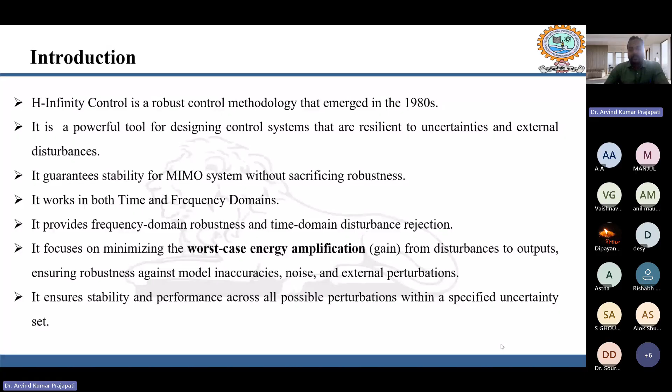It ensures stability and performance across all possible perturbations within a specified uncertainty set. So these are some advantages of H infinity control which we have seen.

So now how did H infinity control come about? In the early 20th century, classical control was proposed, based on trial and error methods like Nyquist plots, Bode plots, and time domain analysis, in which we use PID controllers. These controllers can work in real systems, but they are complex or difficult to use to handle uncertainties or non-linearities, etc.

So to avoid these limitations, modern control theory came into the control system, which is focused on state space representation and optimal control techniques. State space representation means we can represent plants in a state space model, and then control the plant using digital systems. If it is in transfer function form, it is difficult to handle by a digital system. But if you convert your system into state space models, we can easily handle it using digital systems. Then another topic in modern control is optimal control.

In optimal control, the most used techniques are LQR and Kalman filters. The main aim of these controller techniques is to design controllers so that we get optimum performance from the system. However, these methods are also unable to handle the uncertainties or disturbances coming into the system. So in the 1970s, researchers became familiar with these limitations, and they started working on how to design a controller that could also handle uncertainties and external disturbances.

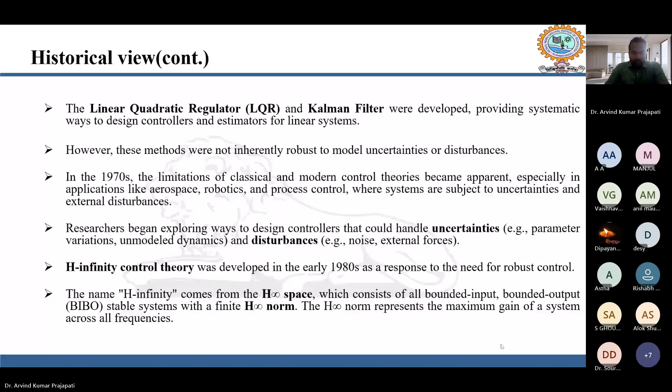So here we are going to learn how H infinity control came into the control system. In 1981, George Zames first introduced the concept of H infinity in terms of sensitivity minimization, meaning he proposed techniques to minimize sensitivity. Sensitivity means our system becomes less sensitive with respect to noise, disturbance, uncertainties, etc. This concept is similar to H infinity control.

Then in 1984, Doyle and Vinnicombe proposed the formal H infinity control problem, which can be solved using algebra, using a transfer function approach to achieve robustness, performance, and robust stability. H infinity control was developed by K. Glover and John Doyle, which can be solved using Riccati equations.

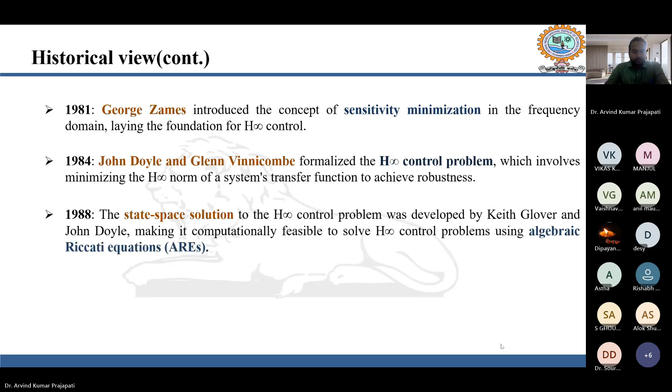So now we can see what is the meaning of H infinity. H infinity is made of two letters, H and infinity. What is the meaning of H? H means Hardy space, which is used to describe the spaces of stable systems in control theory. And infinity emphasizes the H infinity norm, which represents the worst case scenario across all frequencies, meaning it is the gain obtained by the worst disturbance implemented in the system.

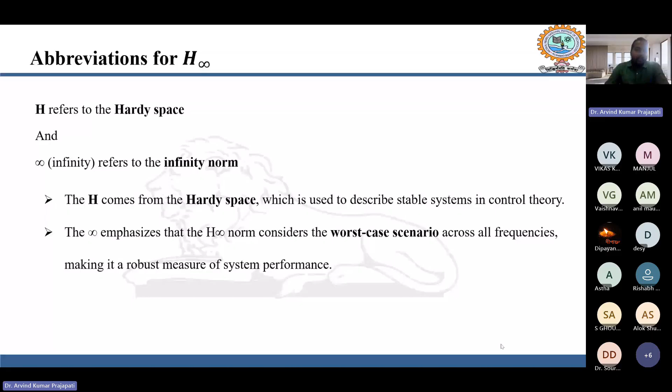So now, what is Hardy space? Hardy space is the space of complex valued functions which are analytic in the right half of the complex S plane. It means the spaces lying in the right half of the S plane, where the real part is definitely greater than 0.

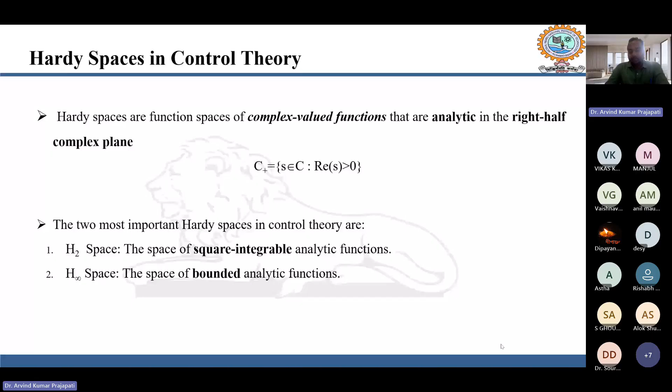In Hardy space, there are two control theory spaces: H2 space, the space of square integrable and analytic functions, and H infinity space, for bounded analytic functions. Now we will see what is H2 space and what is H infinity space.

H2 space consists of all functions of a complex function F(s), which are analytic in the Hardy space, and must satisfy the condition that the H2 norm of the complex function is less than infinity, as given in equation 1. For stable systems, we can calculate the H2 norm using equation 2, defined using the frequency response.

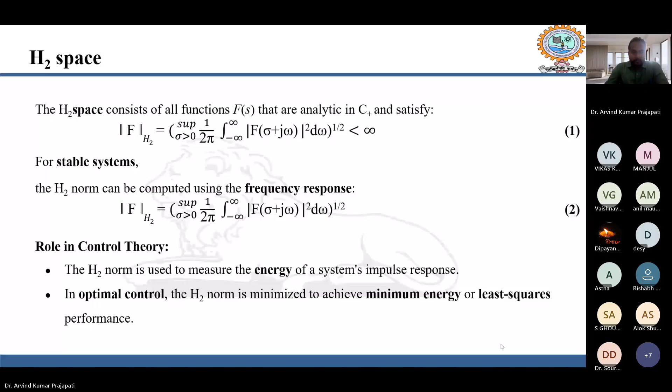So what is the role of H2 in control theory? H2 mainly measures the energy of the impulse response, and in optimal control, the H2 norm is used to minimize the minimum energy or least square performance. Now we can see what is the H infinity space.

So again, H infinity space we can define as all the functions that are analytic in the Hardy space C plus and which satisfy equation 3, meaning the H infinity norm of the complex function F should be less than infinity. For stable systems, H infinity is nothing but the supremum of the complex function, supremum of the singular values of the complex function.

This measures the worst case gain of a system, which is critical for the robustness of the plant. In H infinity control, the goal is to design the controller that minimizes the H infinity norm of the closed loop transfer function, which ensures robustness against disturbance and uncertainty.

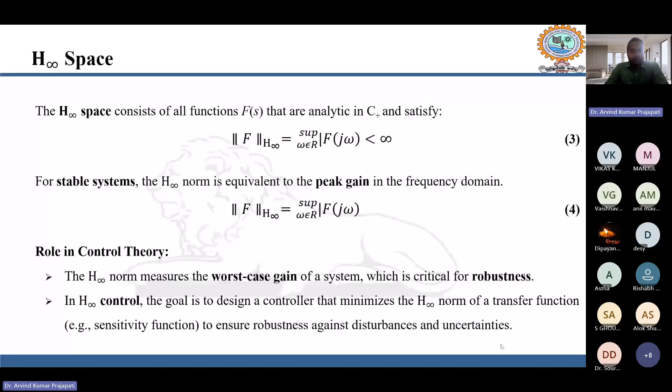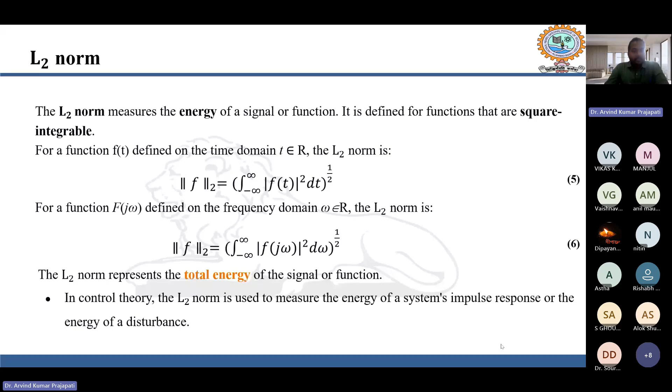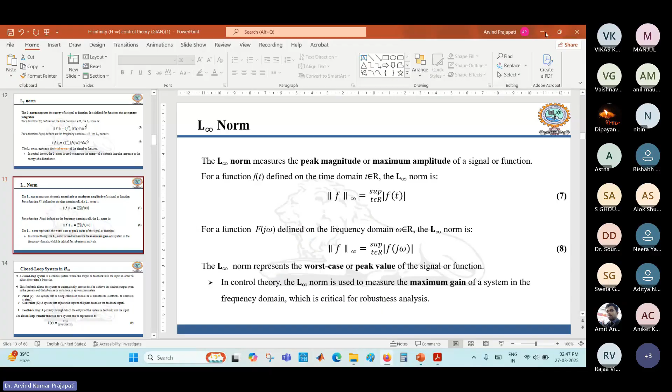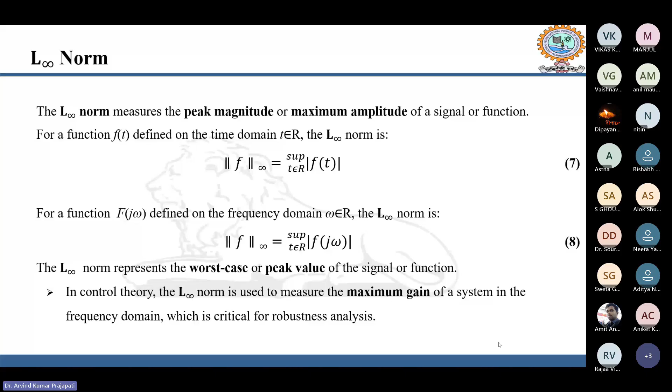So the L infinity norm in control theory is used to measure the maximum gain of the system in the frequency domain, which is critical for robustness analysis.

So the H infinity norm is used in the closed loop system. A closed loop system has a forward path and a closed feedback path. In the closed loop there are three blocks: the plant, which is what we will control; the controller, used to manipulate the control input; and the feedback, which is the path by which we feed the output back into the input side.

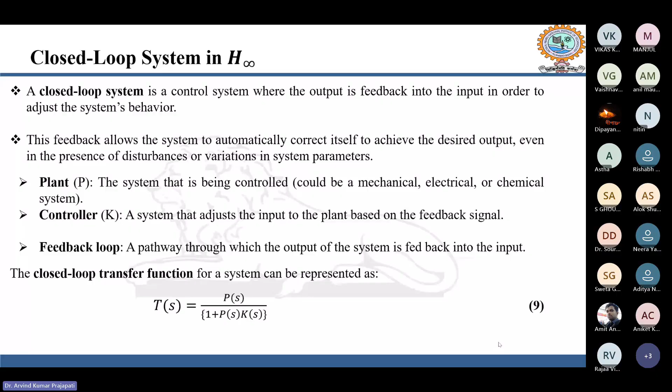So now we are going to define the problem statement of H infinity control. The main goal of H infinity control is to minimize the closed loop transfer function of the system. We have to design the controller so that we can minimize the closed loop transfer function T, and K can also stabilize the system internally. For a given plant, as in equations 11, 12, and 13, we are going to implement our H infinity control. As we have seen, there are two inputs and two outputs.

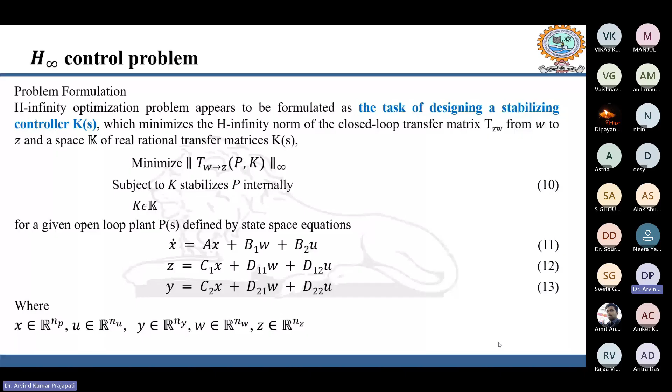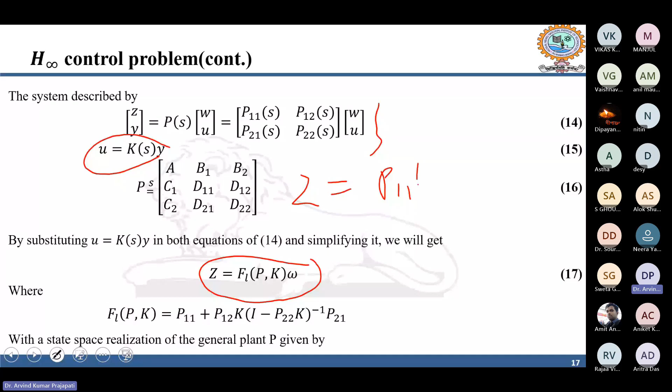So by putting U equal to Ky in these equations, we can convert this into the form: Z is equal to P11W plus P12U, and Y is equal to P21W plus P22U. Here, if we put U equal to Ky in this equation, then we get Y is equal to P21W plus P22K times Y.

So here Y and Y is there, so we can take common. We will get Y value, and here we have already put U equal to Ky, so that Y we will keep here. So we will get Z, which is nothing but P11, P12, and this times W. So what is the use of this?

So here we are going to correlate the output error with respect to disturbance input, reference input, or uncertainties. Here we can see the disturbance or reference input or uncertainties are directly related with the error Z.

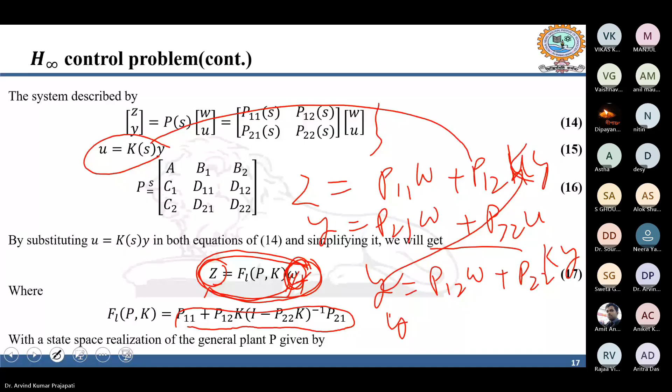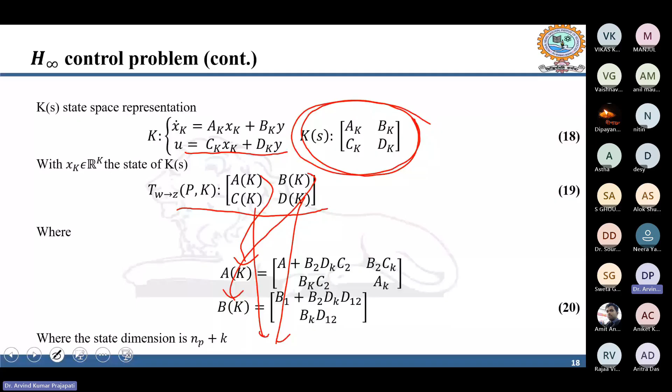We will get this. So our objective is to minimize, meaning we have to get the H infinity norm of the closed loop transfer function T, and that is nothing but the maximum of the maximum singular values of the closed loop transfer function T.

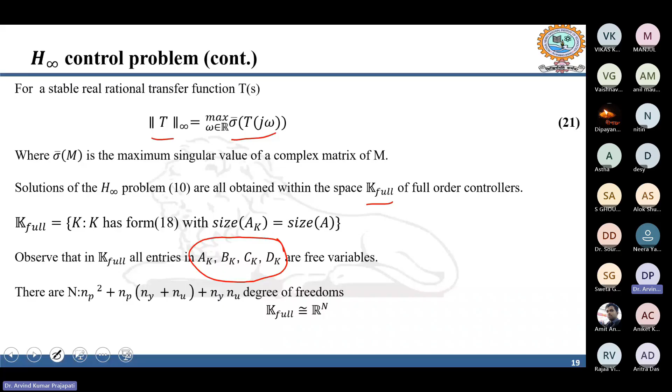The solution of equation 10, within the K space, means the values of the controller lying in the K space. So we can get the unknown parameters of the controller by minimizing T, which is the closed loop transfer function.

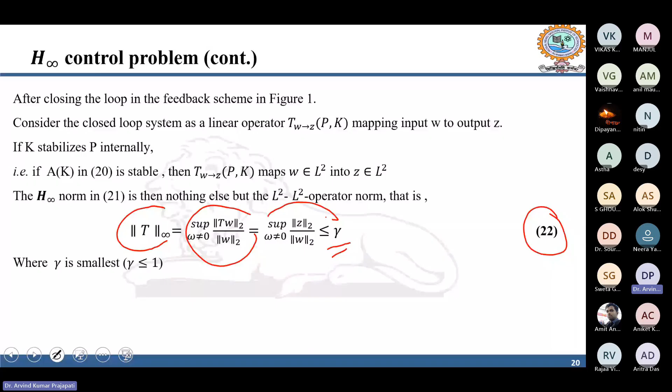So the H infinity norm in equation 21 is nothing but the L2 norm operator, which we get in equation 22, and it is nothing but this. By using this, we can determine the closed loop transfer function, and the closed loop H infinity norm of the closed loop should be less than gamma, and gamma will be given, and that must be less than 1 for getting robust stability and robust performance of the plant.

So in the previous problem, we have seen there is only one exogenous input. But there may be different errors. Our objective is to control the disturbance rejection, control the tracking accuracy, and control the control efforts. So there are three outputs which we want to control or minimize, etc.

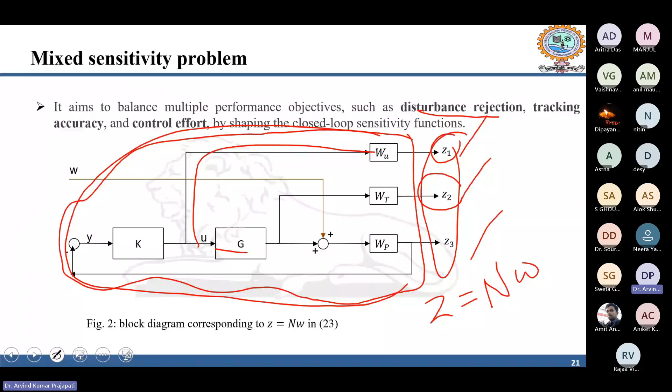Here in equation 24 we can get this from the block diagram. From Z1 we get U times WU. For Z2 we get G times U into WT. So from this we get the values of Z1, Z2 and Z3.

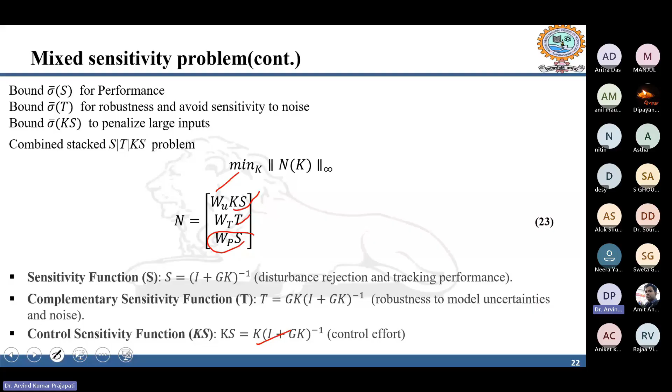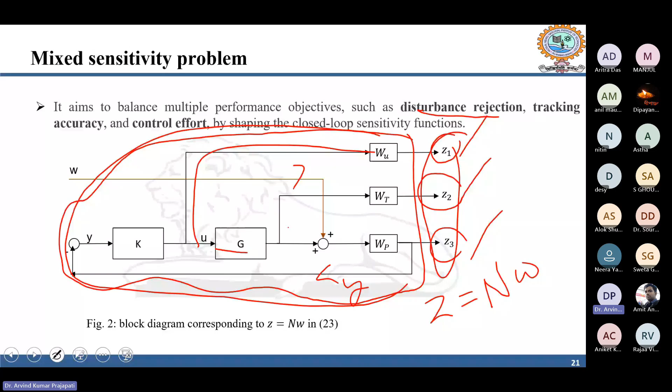Similarly we can also get the value of Y. So Y is nothing but W, and this is U, multiplied by this. So this is the value. Having three outputs which we want to control, we can write our plant in this term.

We can use the matrix WU, WT, and WP according to our requirements. And then the H infinity norm of N should be less than gamma. And what is the control sensitivity? That is used to limit the control effort in the frequency band.

We have to increase the weighted matrix WU in the given frequency band. So for minimizing T at high frequencies, we have to choose WT as large outside the bandwidth to obtain a small T.

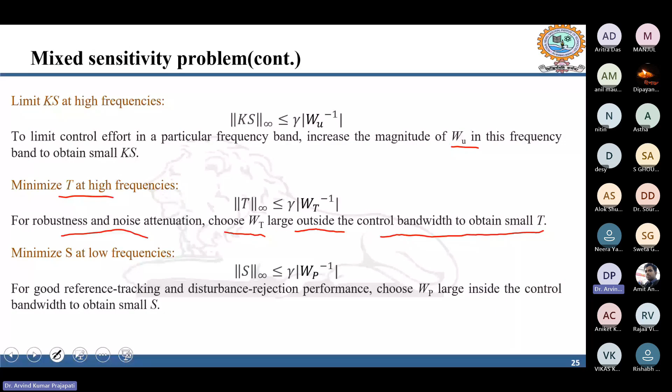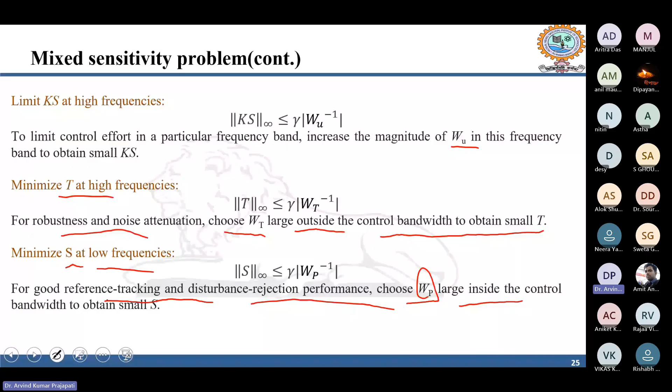We also have to minimize the sensitivity function S at low frequencies. For good reference tracking and disturbance rejection, we have to choose the weighted matrix WP large inside the control bandwidth to obtain a small gain. So these are the problem formulations for solving the H infinity norm.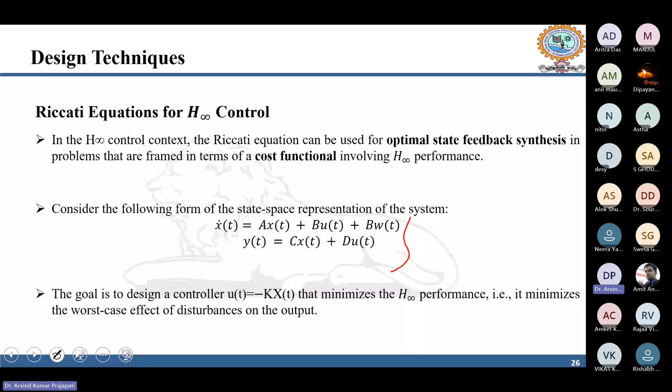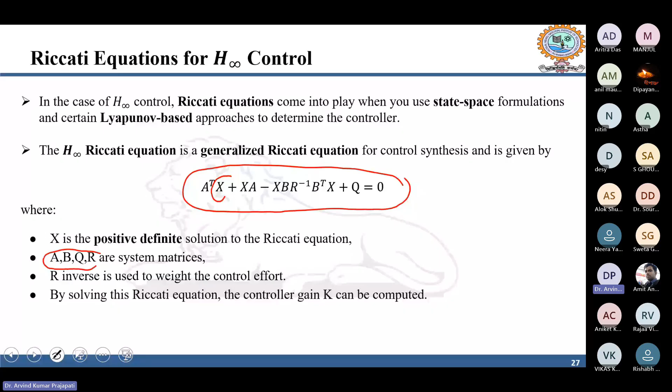So what is the Riccati equation? Everyone is knowing this. What is our objective in the Riccati equation? We have the Riccati equation, with A, B, Q, R, which are the known system matrices, and by solving this Riccati equation, we can get the controller matrices K.

So here this is the plant, a numerical plant. We are going to see the numerical solution using the H infinity method. This is the plant, in which matrix A, B, and then C and D are given here. So what is the objective? The objective is to design a controller that minimizes the worst case effect of the disturbance D on the output.

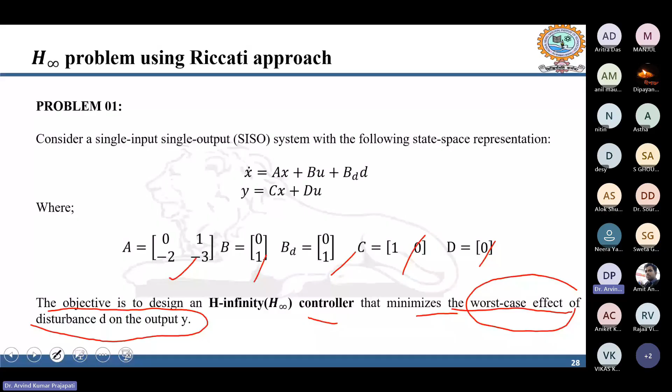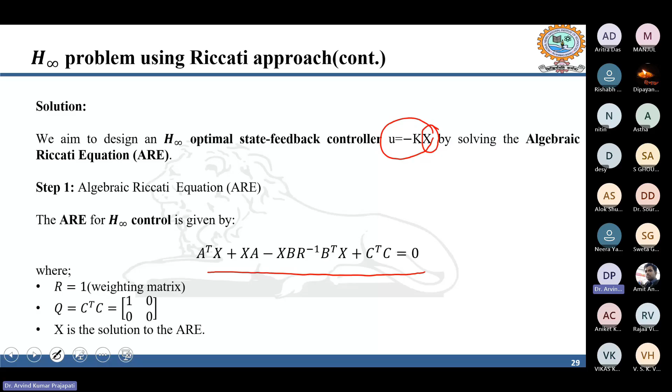So what is our motto? Our motto is to design the controller so that there will be least effect of disturbance on the output Y. So here we can solve by using Riccati's equation. We will assume U is equal to minus K times X, and by solving the Riccati equation we will get that X. The Riccati equation is given here, in which we already know the value of R and the value of Q, and we have to find out the X value.

So here, to solve the Riccati equation, we will assume the value of X. It will depend upon the order of A. The order of A is 2 by 2, so the order of X will also be 2 by 2 only. So here we can solve one by one. First we are going to solve this term, and then we can solve this other term, and then we will combine them and get the value of X.

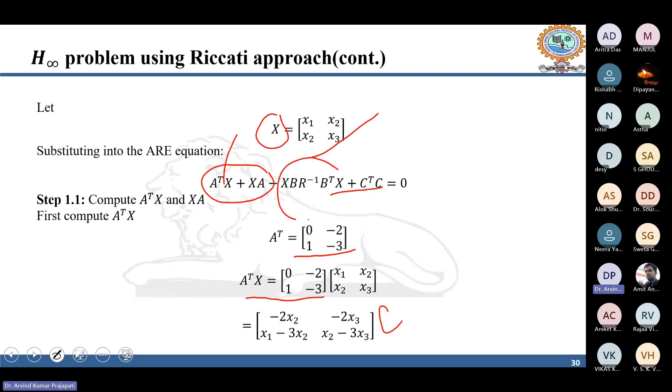This is A transpose, and if you multiply, you will get the A transpose X term, and similarly if you multiply you will get the X A term, and if you add them you will get this combined term. Similarly, if you solve this other term, you will get this, and if you add everything together, you will get the value of X. If you equate it to 0, then you will get the value of X.

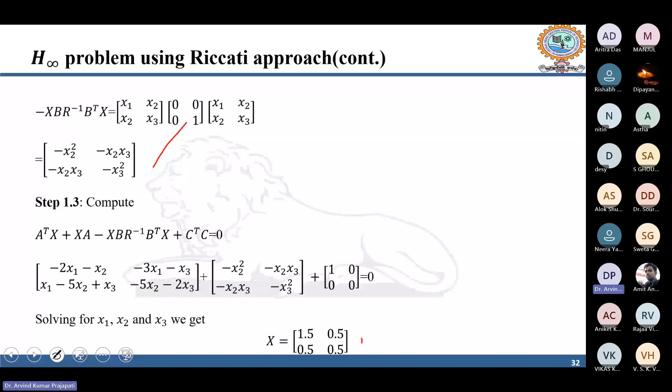So by using X, we can determine the controller matrix K. The controller matrix K is obtained by using the Riccati equation, and by using this, we can minimize the effect of disturbance in the output.

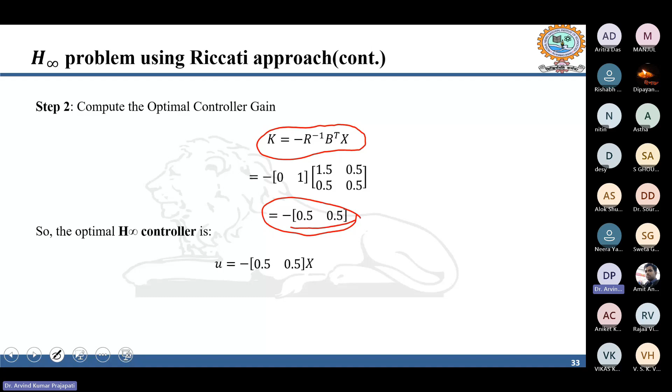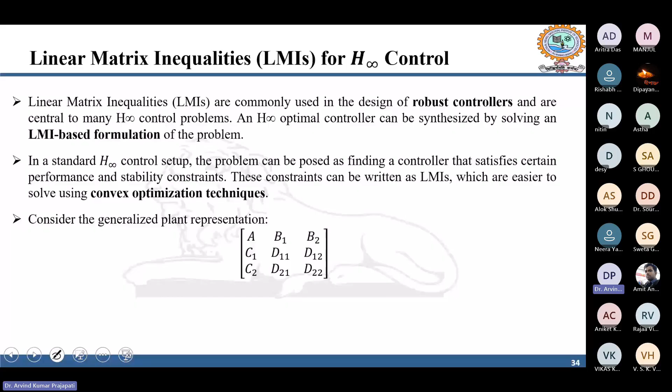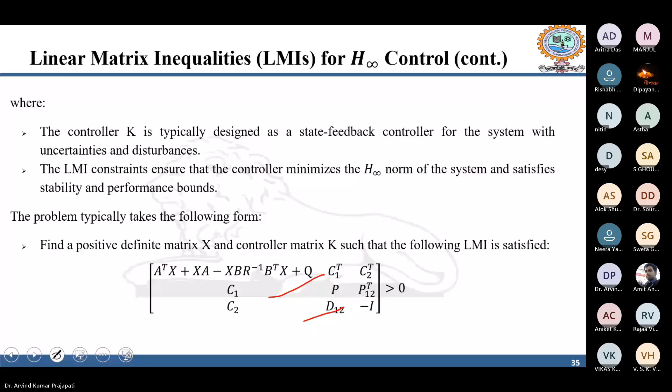Now we can also solve the H infinity problems by using the LMI's approach. In the LMI's approach, we first have to construct some constraints based on the requirement. These are the constraints which we have to minimize by using the H infinity norm. So what is the motto here? Our motto is that the system should be stable, and the disturbance to output gain should be bounded by the H infinity norm. If the LMI is feasible, the controller can be derived ensuring robust stability.

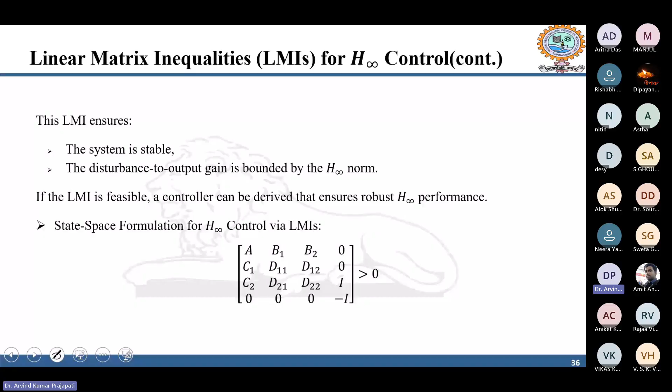Let's see how we can solve these mathematical problems by using the LMI's approach. These are the plants given here, and this is our control input which we have to find out by using the LMI's approach. What is the motto? The motto is that the closed loop transfer function should be less than the gamma value, and gamma will be less than 1. So these are the constraints which we have to solve.

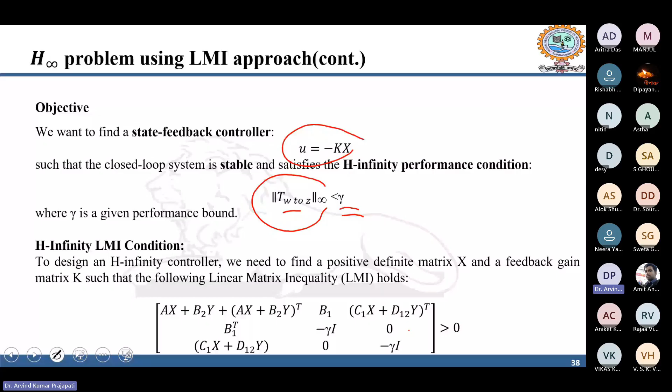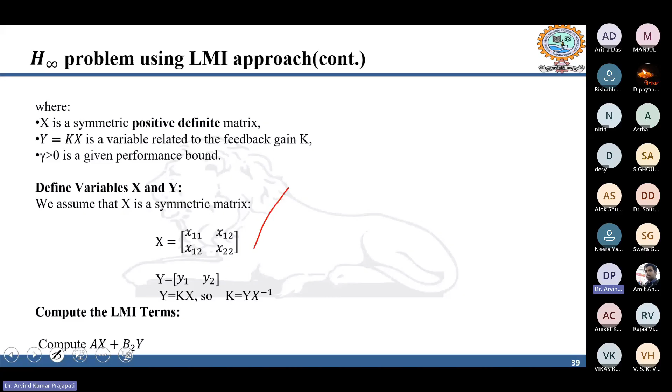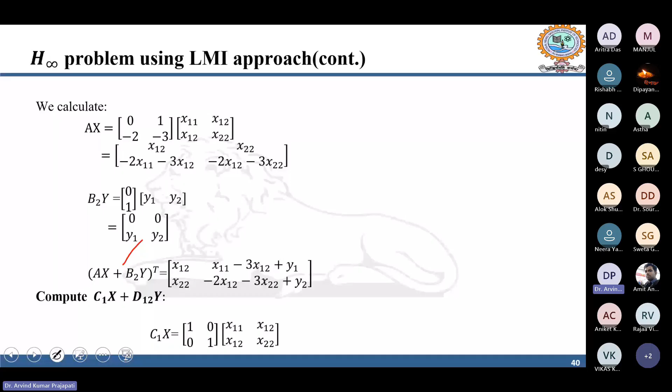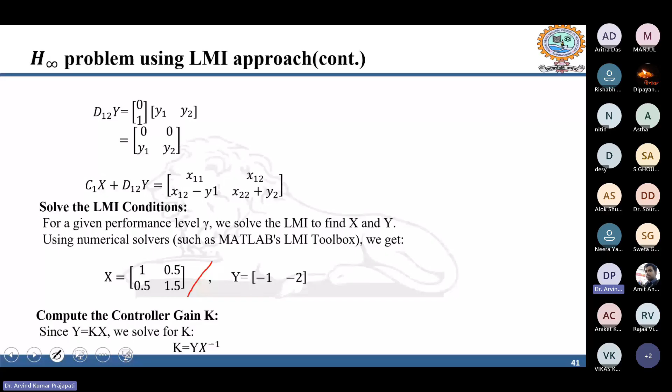By solving these, you can define the value of X, like in the previous problem we also defined the X value, and we will solve this one by one, and then combine them. If you combine, you will get finally the values of X and Y, where Y is equal to K times X. So we can get the value of K, and by using K we can design our control input U. By using this input, we can minimize the effect of disturbance in the output.

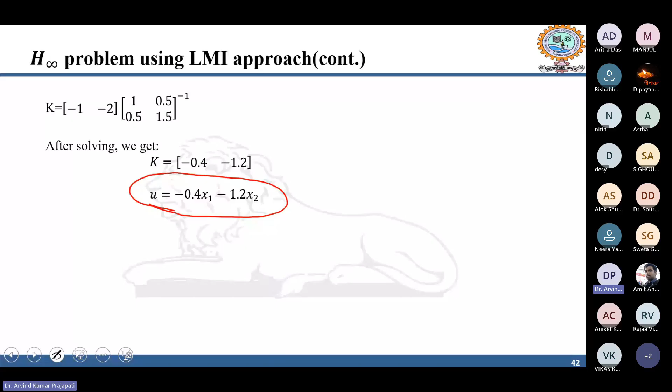So now we can see, if you are going to design the controller by using the H infinity norm, what are you compromising? It's in terms of stability and performance. We design the controller so that we can get robust stability and robust performance when there are uncertainties and external disturbances in the plant.

So robustness means what? Means your controller is able to handle uncertainty, disturbance, and variations. And stability means our system is stable even though the system is subjected to uncertainty, disturbance, etc.

So if we are going to design the controller which achieves better disturbance rejection, it will be more conservative. A controller is designed to reject disturbance from a wide range of frequencies, so it may compromise the system performance at lower frequencies or result in higher control effort or larger controller gains.

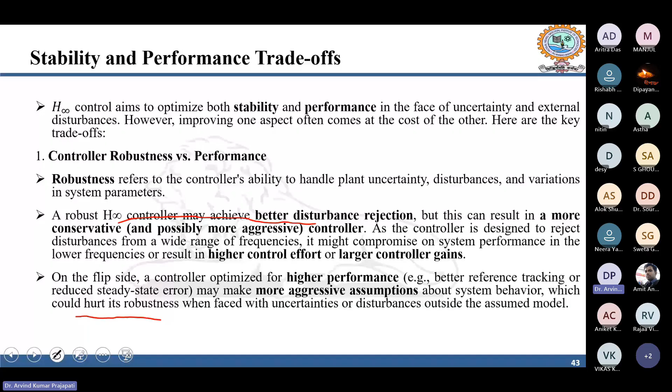On the opposite side, if we are going to get robust performance, meaning better reference tracking or reduced system steady state error, we may make more aggressive assumptions. This could reflect system behavior that creates problems in robustness when there are uncertainties or disturbance. Similarly, what will be the effect on the gain?

So H infinity's aim is to balance two important characteristics: the sensitivity function and complementary sensitivity function. Sensitivity means, if the system has disturbance or noise, if it has less sensitivity, then its output will be less sensitive.

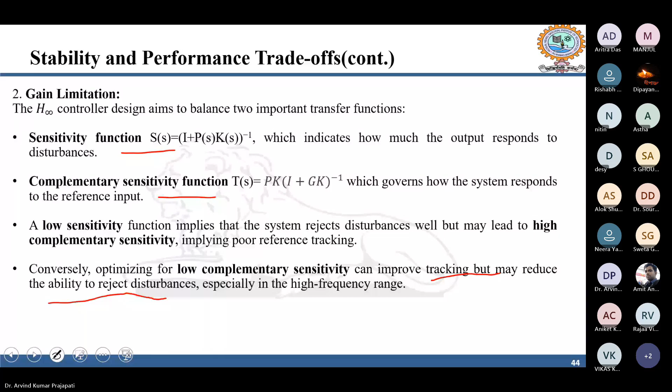And complementary sensitivity function means, if we optimize for low complementary sensitivity, this can improve tracking but may reduce disturbance rejection, especially in the high frequency range. So if you design H infinity control from the sensitivity point of view, it may not provide good tracking.

And if you design for good tracking purposes, your system may become more sensitive to uncertainties or disturbance rejection. So in this context, we have to compromise: maintain stability when the system is subjected to uncertainties or external disturbance, and also get robust performance which can reject disturbance, noise, or modeling inaccuracies.

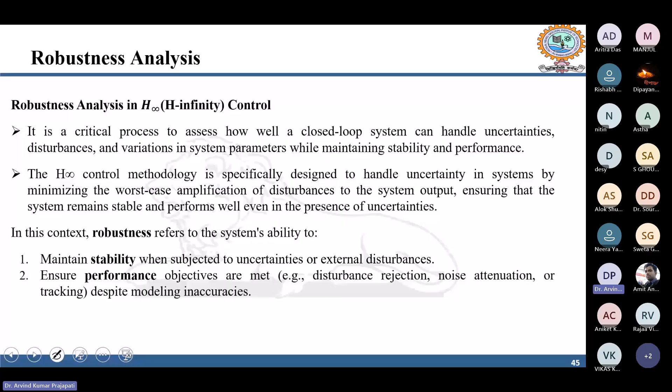So now we have to see why we are learning H infinity control. What are the key aspects of robustness in H infinity control? The key aspect is that we have to design the controller so that it can handle uncertainties. What types of uncertainties? Maybe parametric uncertainties, modeling errors, external disturbance, or measurement noise.

In H infinity control, these uncertainties are represented by blocks that can be added to the system's transfer function. The main objective of H infinity control is to minimize the effect of these uncertainties on system performance, which can be achieved by ensuring the system rejects disturbance within given uncertainty bounds. Now we can see sensitivity and complementary sensitivity function.

In terms of H infinity, we have already learned what sensitivity is. A lower sensitivity indicates better disturbance rejection, which is a key aspect of robustness. This means our system is robust, so it will be less sensitive to disturbance, noise, or uncertainties. And complementary sensitivity means the function that measures the system response, which tracks the input.

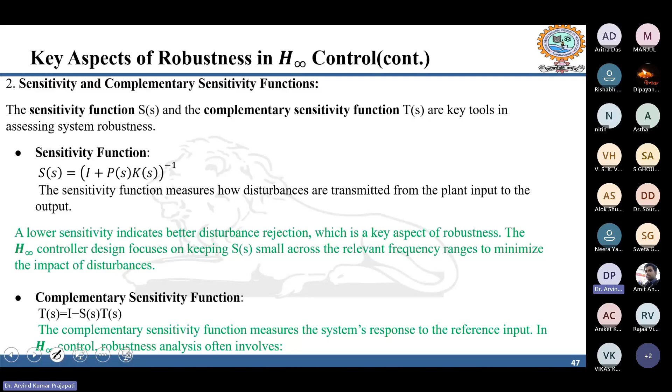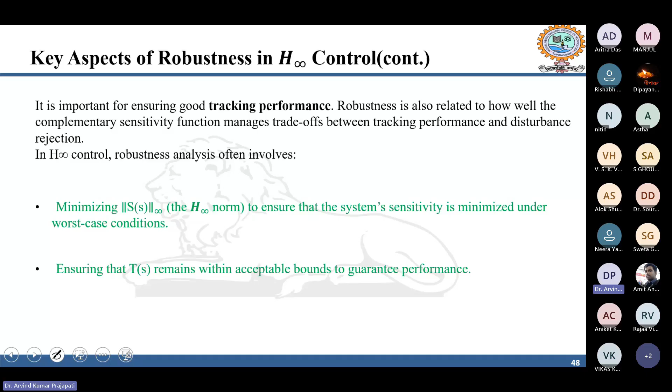In H infinity control, robustness analysis often involves minimizing the sensitivity function S, which can ensure system sensitivity by minimizing the worst case condition, and ensuring that the complementary sensitivity function remains within acceptable bounds to guarantee performance.

Now we can see robust stability in H infinity control. In H infinity control, robust stability and robust performance are the key objectives, which is the motto for controller design.

Here stability we can check by using the Lyapunov stability theorem or small gain theorem. By using these, we can also check stability by determining the closed loop poles of the system, and these should lie in the left half of the complex S plane.

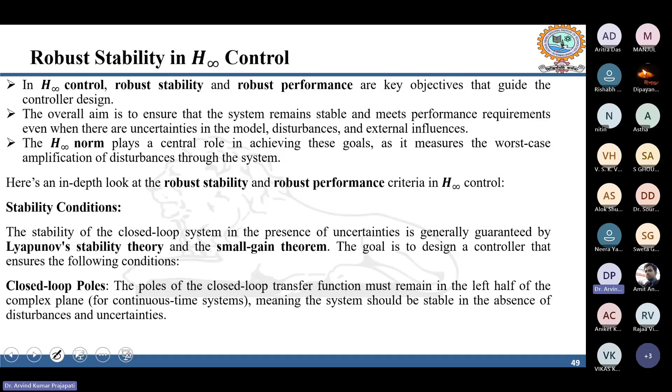So for the uncertainty model: if there are uncertainties in the plant, which may be multiplicative uncertainties or additive disturbance, they are represented by uncertainty blocks. The controller must be designed to ensure that the closed loop system remains stable under all possible variations of these uncertainties. So how can we check robust stability?

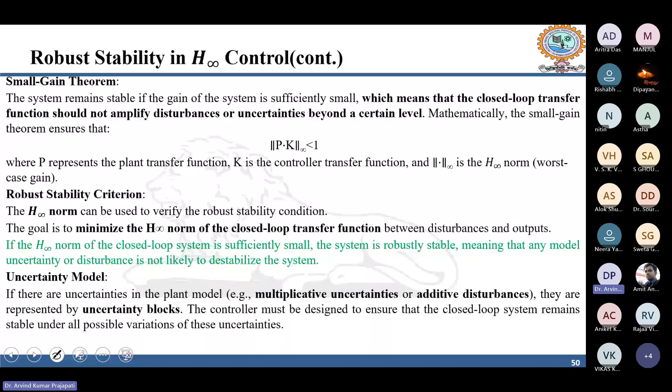We can check robust stability by using Lyapunov methods; if we can find a suitable Lyapunov function, then we can say it will ensure stability under some perturbations. The small gain theorem provides criteria for robust stability, ensuring the overall gain should not exceed a particular threshold value. And in the frequency domain, we can check stability using Bode plots or Nyquist plots, which are commonly used to analyze stability margins and verify robust stability under uncertainties.

In H infinity control, robust stability and robust performance are achieved through careful design that minimizes the worst case behavior of the system in face of uncertainties and disturbances.

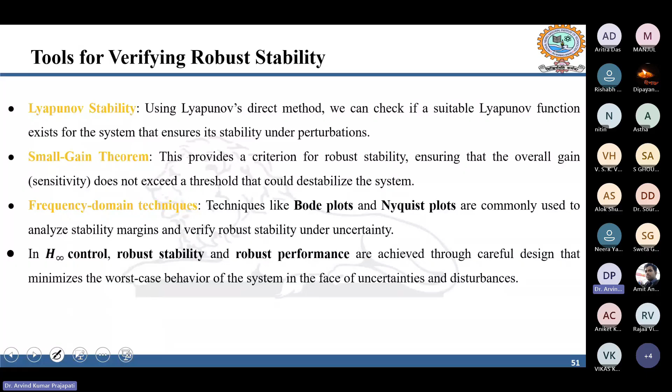So case studies of robustness in H infinity control. If we want to control an aircraft, there are so many disturbances, like varying wind, sensor inaccuracies, and dynamic changes. We have to handle these challenges by designing a controller that can handle these uncertainties while ensuring both robust stability and robust performance in tracking and disturbance reduction.

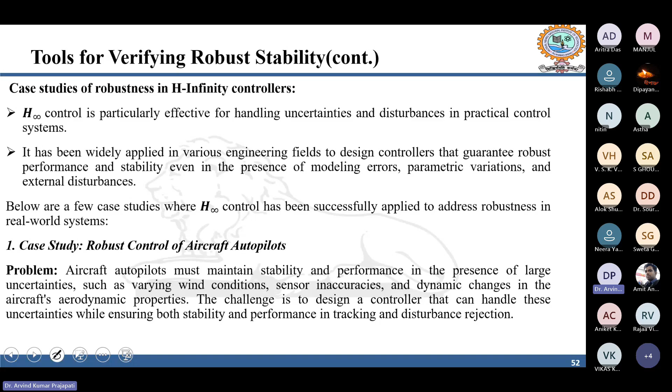So how can we do this? We design an H infinity controller that minimizes the worst case impact of uncertainties on aircraft performance, and that also provides robust stability. The controller is designed to ensure stability under worst case disturbances by maintaining the desired robust performance of the aircraft, minimizing system sensitivity to aerodynamic uncertainties while preserving excellent disturbance rejection.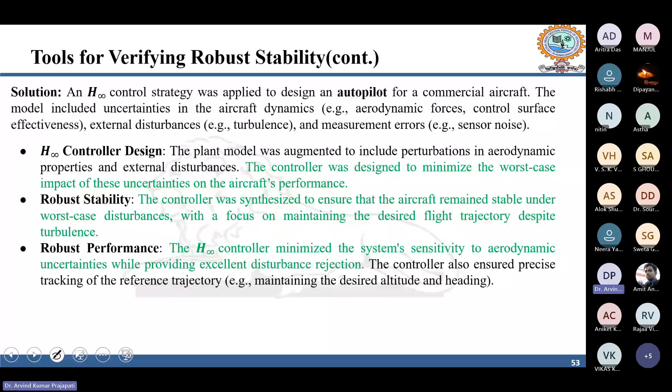So what is the outcome? The H infinity autopilot controller successfully stabilizes the aircraft even in the presence of significant external disturbances like turbulence. Robust performance is achieved across a range by ensuring the aircraft rejects disturbances such as wind gusts, maintaining steady flight with minimal deviation from the desired path. The design ensures robustness against model uncertainties, which is essential for flight safety in real world applications.

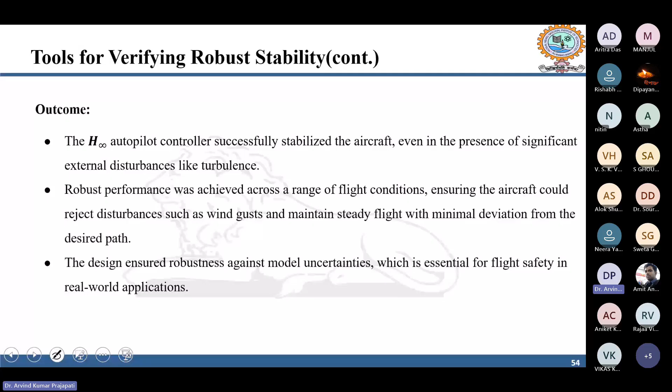So now we can see where we can implement H infinity control. It is a widely used technique in control systems where uncertainties and disturbances exist. We can see applications in aerospace and automotive engineering. In aerospace, it enhances stability and robust performance against uncertainties, sensor noise, and turbulence. It can also be used in missile guidance systems to improve trajectory tracking and disturbance rejection.

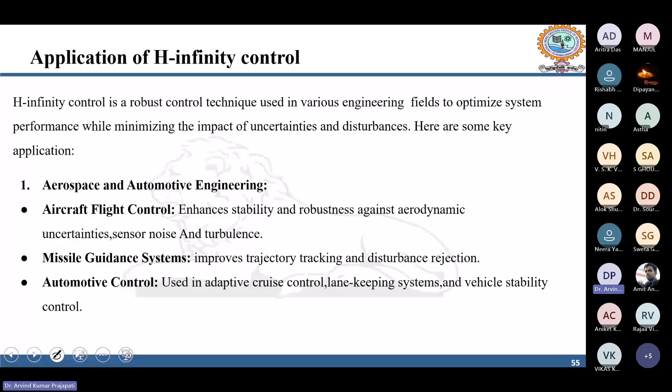In automotive control, it can be used for adaptive cruise control, lane keeping systems, and vehicle stability control. H infinity control can also be used in robotics and mechatronics, for precise motion control under dynamic uncertainties.

In power systems and electrical systems, we can use H infinity control for power grid stability, frequency and voltage control. In smart grids and motors, it enhances robustness in servo and induction motor control. In process control, it maintains desired operating conditions despite disturbances, and in oil refining and pipelines it controls pressure and flow rate of liquids.

In communication and signal processing, H infinity control is used for filtering signals, enhancing speech and audio clarity. In network control systems, it improves stability under communication delays and packet loss.

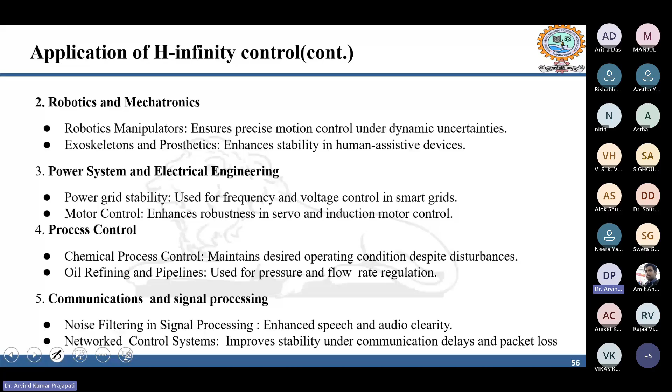Now we will see a comparison of H infinity with other control methods, focusing here on LQR and PID. H infinity control is focused on designing a controller for robust performance under uncertainties, minimizing the worst case gain of a system, where that gain is obtained when disturbance is taken as an input. LQR is focused on getting optimum performance by minimizing a cost function, balancing state deviation and control effort. PID control is a simple and widely used feedback control that corrects error based on proportional, integral, and derivative terms.

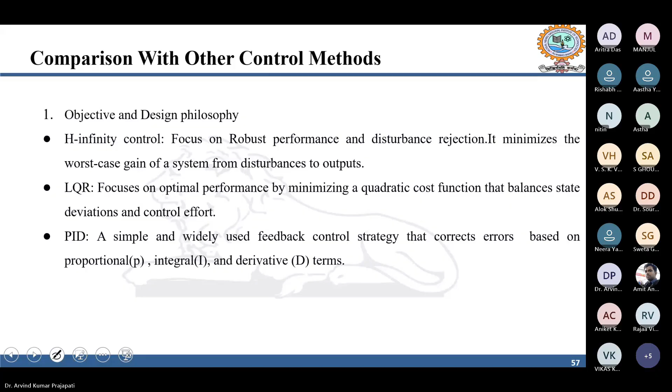Now we will see the comparison in terms of handling uncertainties and robustness. H infinity handles model uncertainties and external disturbances, making it robust against parameter variation and unmodeled dynamics. LQR assumes an accurate model and does not handle uncertainties; it provides optimal performance only for the nominal system.

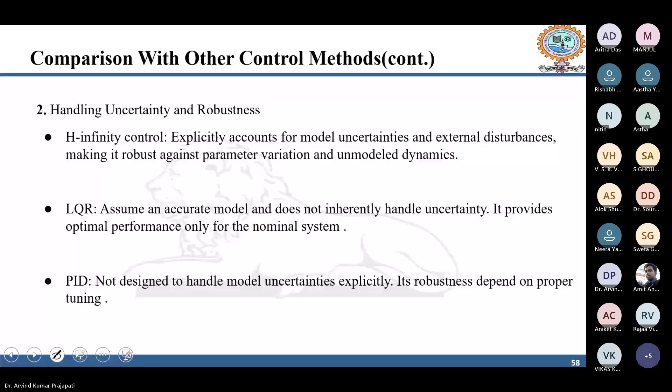PID controller is not robust with respect to uncertainties. PID control works well in many practical applications, but it struggles with nonlinear and time delay systems.

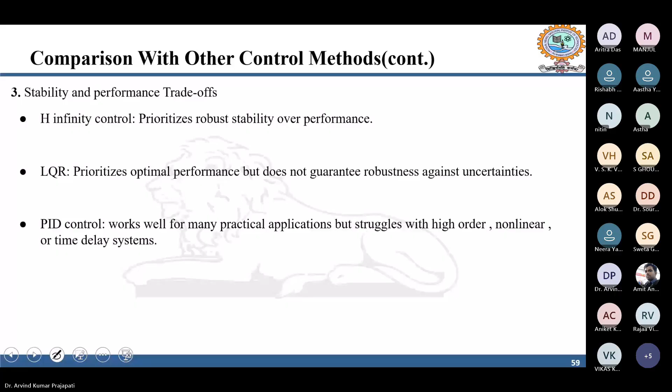For the fourth point, we can compare H infinity control with other methods on computational complexity. H infinity control involves algebraic Riccati equations. PID controller is one of the simplest techniques to implement. In practice, we can use H infinity control in aerospace and robotics for uncertain systems where robustness is more critical. LQR can be used in trajectory optimization, economic models, and process control.

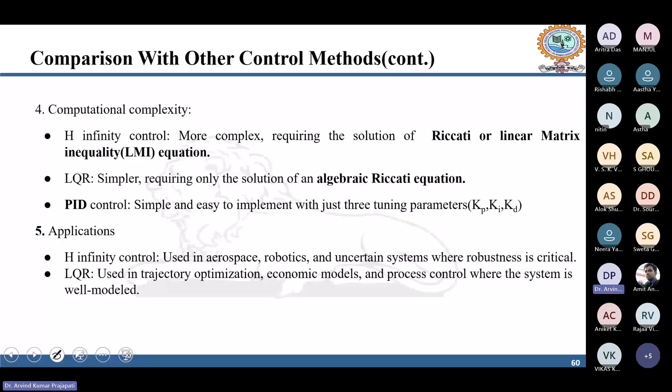It provides superior rejection of disturbance. It can easily handle multiple input and multiple output systems. Even though it can handle single input single output systems too, it can also handle MIMO.

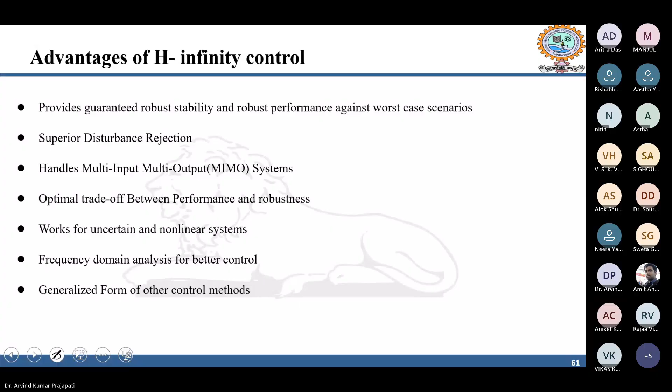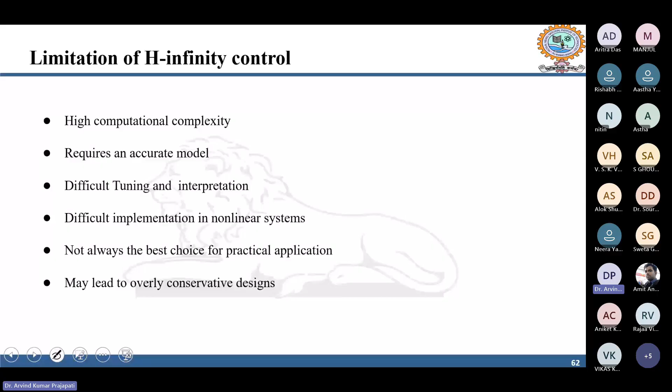Now let's see where H infinity control is recently being used. H infinity control is also extended to nonlinear systems using Hamilton-Jacobi-Isaacs equations. It also involves solving nonlinear problems using machine learning and dynamic programming.

H infinity control is also used in model predictive control, which combines H infinity control to handle constraints. It allows model predictive control to get robust trajectory optimization while considering the system.

Exact H infinity optimal controls may be difficult to implement in practical applications due to computational complexity or limitations.

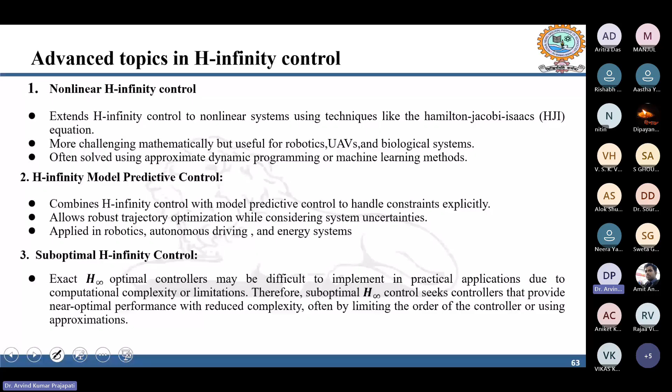H infinity control and performance can be implemented in multi-agent systems. H infinity control methodologies can be extended to multi-agent systems where you ensure robust performance across networks of interconnected agents. This includes managing disturbances, uncertainties, and modeling errors.

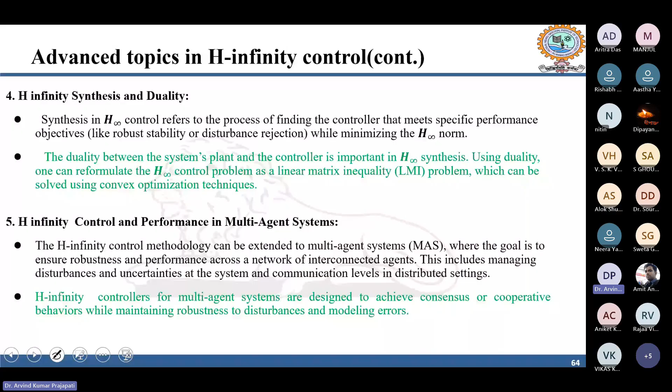Controls involve multi-objective functions. Advanced H infinity control problems may involve multiple performance objectives that must be balanced simultaneously. This could also include meeting constraints. The H infinity control problem can be formulated as LMIs, which relate to the problem of H infinity performance.